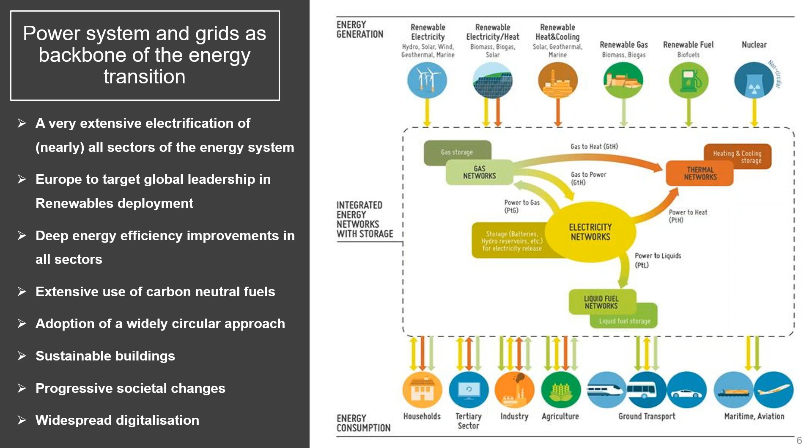Electrification, additional electricity users, e-mobility, becoming carbon neutral as fast as possible, sustainable also in the building sector, not only mobility, and all this thanks to widespread digitalization.

So it's about efficient smart grid systems. We've been looking at that for the last 4 to 5 years now, and it's progressive. As you see, we'll discuss today a first white paper the working group produced on sector coupling, but things evolve. We want to go more into detail, so we're currently already working on the second white paper. It's really about how to optimize everything connected, related to electricity grids, and the integration of this electricity backbone architecture within the overall energy system.

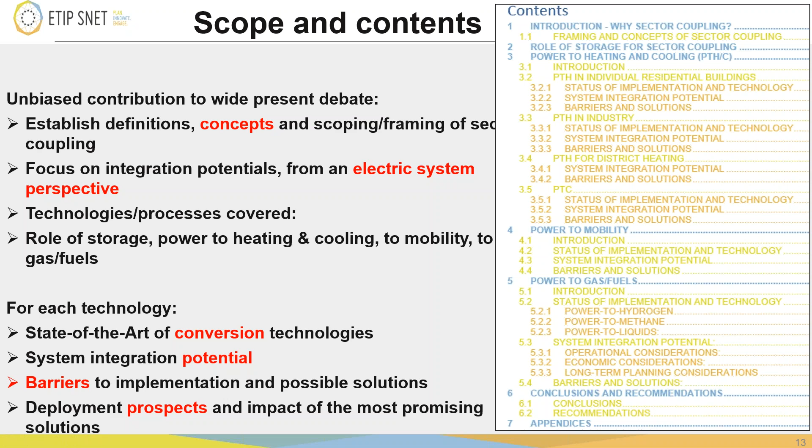Maybe it's only slow. Let me see if it works. We have a plan B, but we'll try to stick to this.

The white paper is a bit wider than what we are going to present here - of course it's some tens of pages, so for more details you can go to that one. The second white paper will be a bit different. It's not touching anymore on the technologies of energy conversion, but on many other issues around this and the ecosystem - building blocks, interoperability, some digitalization aspects, architectures, and also economic assessment of use cases. This will be published at the end of the year.

So entering into the topic of today, we have to be a bit preemptive on the timing of this - there is some delay.

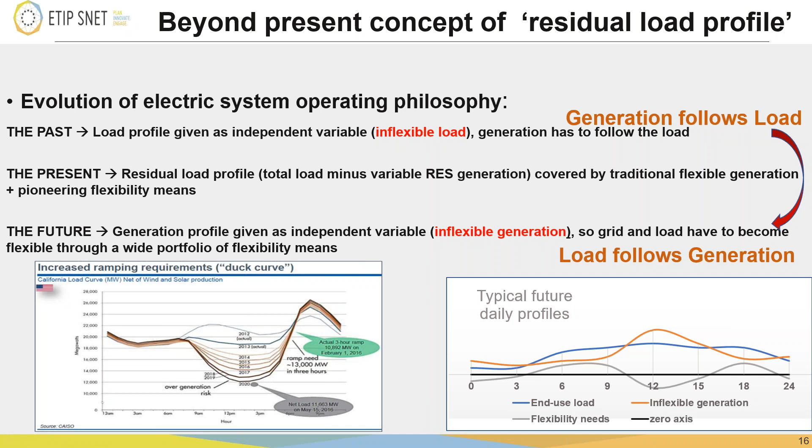About today, because of the issues.

We are in a big paradigm shift today. We are passing from managing the network as load, where generation has to follow the load - load being an external independent variable and generation adjusting with its flexibility. We are now in a transition period talking about residual load, but we will arrive at a situation where variable renewables dominate and load will have to follow generation instead. So we have to build flexibility into the load, into the grid. Flexibility has become the most important issue for grid operation.

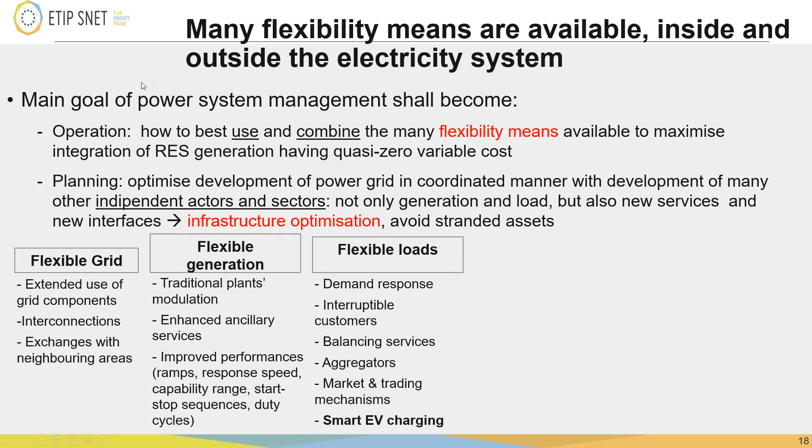I think we will have to go to plan B, Gustavo. If you can take control, I will ask you from this moment on to go.

Flexibility is both in operation and in planning. In operation, it's about how to best use and combine, from a techno-economic point of view, all the many flexibility means available. Planning takes a step further, to plan in a coordinated way not only the grid reinforcements, but also the load and generation evolution and the flexibility means evolution.

We can categorize flexibility in many ways. Here it is categorized by sector. First, there is some flexibility within the grid itself, already used at maximum level. Then flexibility in generation - the traditional one, thermal or hydro plants, which can be adjusted with certain time constants. But now we need flexible loads, which we traditionally had through interruptible customers - a rough way to call a flexible load. We will have demand response, which is a low-hanging fruit. It will be important, and now it has become important.

Other flexibility means include storage. Storage can be classified in many ways - here classified by whether it is within the control of the electric system or beyond. Whatever device is directly connected to the electric system, exchanges energy as electricity and gives it back as electricity, is normally under the control of the electric operator since it's connected to the grid. But the next stage, and what we are actually dealing with today, is flexibility beyond this.

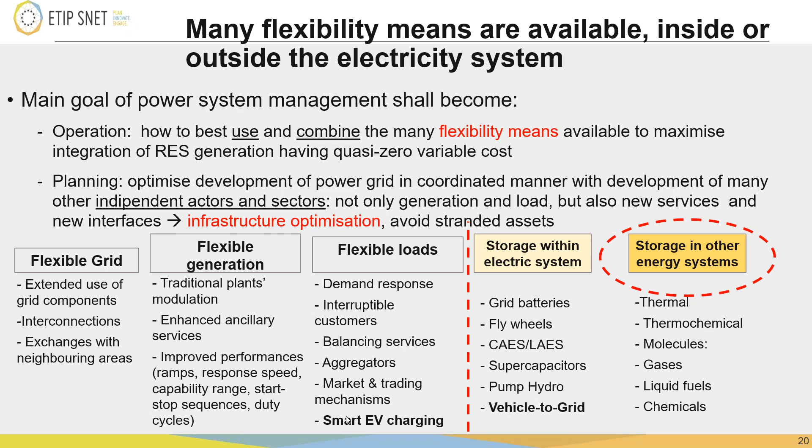Here it's written as storage, but it's not only storage - it's also flexibility means in other energy systems. In the next slide we can see this can span different energy sectors - transport, district and industrial heating and cooling, but also residential through district heating. It can take the form of molecules, touching on the chemical industry, producing hydrogen and its chemical derivatives. You can have synthetic fuels, and eventually these molecules can also be transported.

There are many definitions of sector coupling. What's given here is still from an electric operator's point of view, because it's important to note that if you couple sectors, you have to match the needs of both or more sectors - there can be more than two coupled. As ETIP SNET, particularly Working Group 1, we see the perspective from the electric system, which has to be matched with other perspectives. Sector coupling in general can be seen as an optimization among multi-energy options for supplying final uses. On top of this, a more advanced interpretation is to have CO2-free fuels for transport, and even alternatives to power transport using molecular transport.

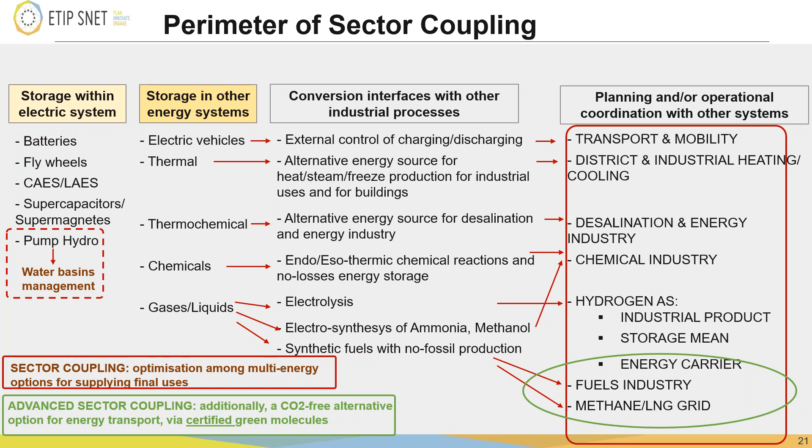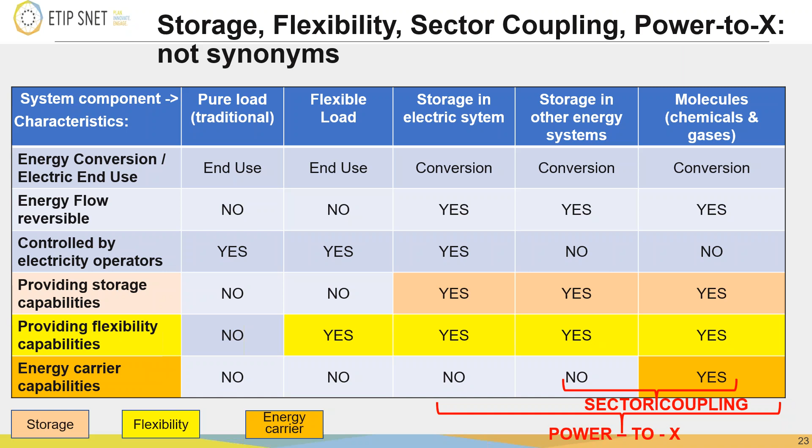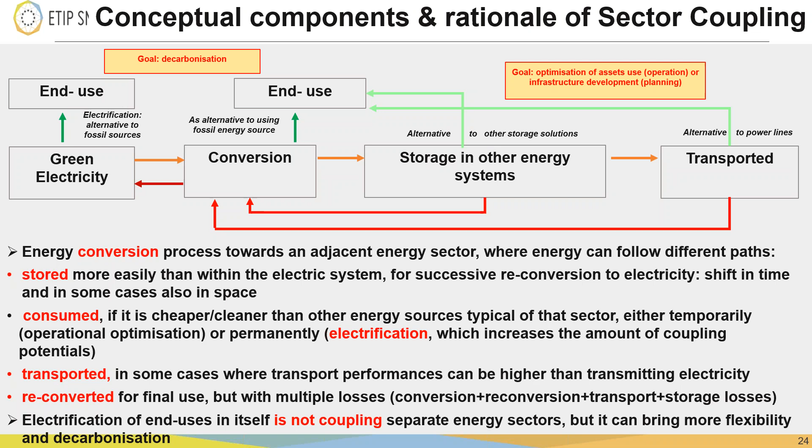It's important to say that either the goal is decarbonization, or it can be optimization of the infrastructures, either in operational or in planning stage. I see these as the two main categories to go for sector coupling projects.

They may coexist, but it is important to have them in mind, because when we have to assess any project economically in an agnostic way, not coming from a preconceived idea that, for example, we have to go for hydrogen because everybody is going to hydrogen, I think the right concept should be: what is the goal for this project? Let's build the use case, and then we put the numbers, economics, it becomes a business case, then we can assess it. So it's always important to assess this project versus the best alternative we have without sector coupling, but achieving the same goal.

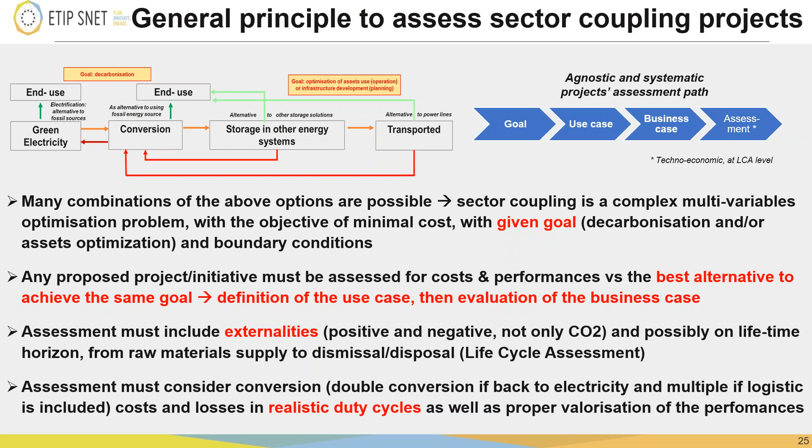For example, if I go to electric cars with non-smart charging, I just have an extra load in the grid, in the system. I need to make adequacy adjustments to the generation fleet, to the grid, especially the distribution grid. So I have an extra stress to the system, I don't have help. If instead I use smart charging, then I have another flexibility means, because I can control from outside the rate and the time of charge, and this gives flexibility to the system.

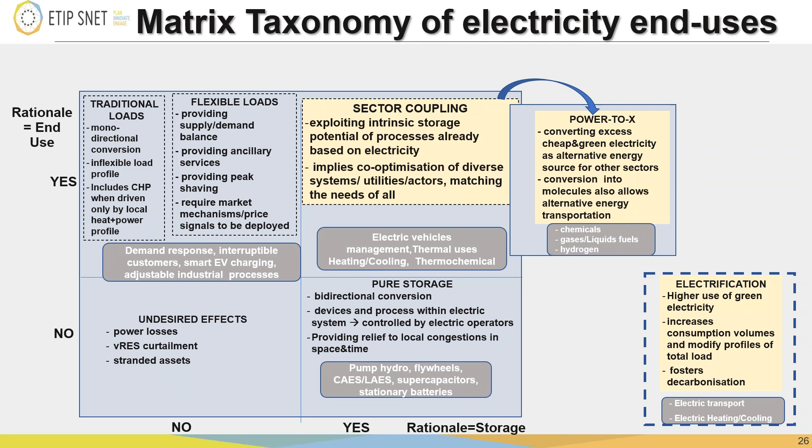Another form of taxonomy can be based on the flexibility features. Since flexibility is the paramount need of the grid of the future, you can ask yourself if they can give or not, and how much flexibility. You can have a taxonomy based on this.

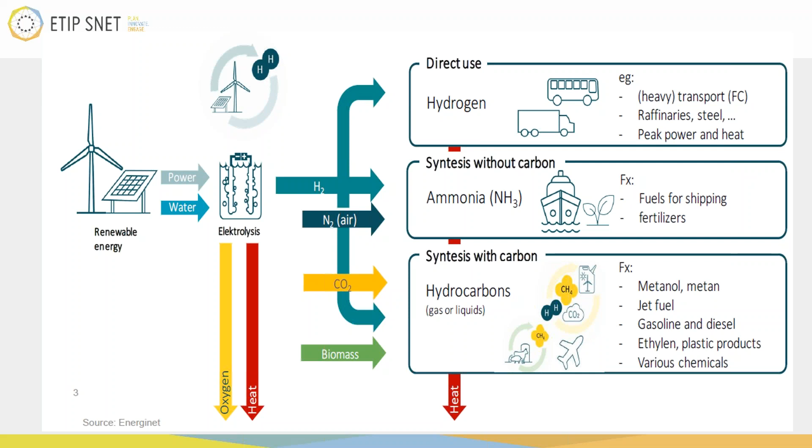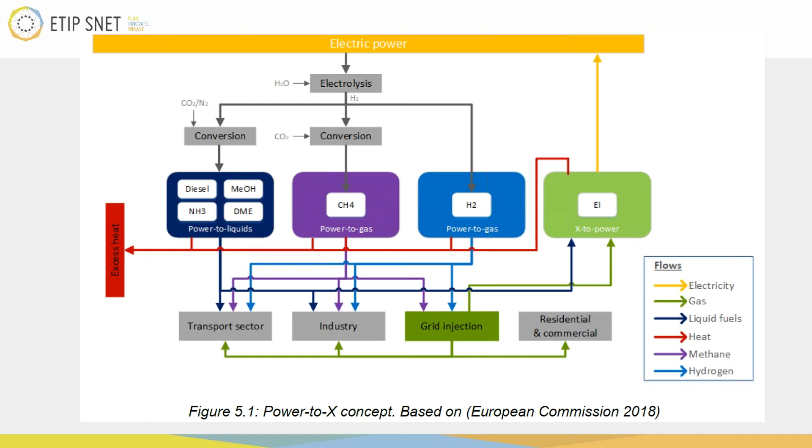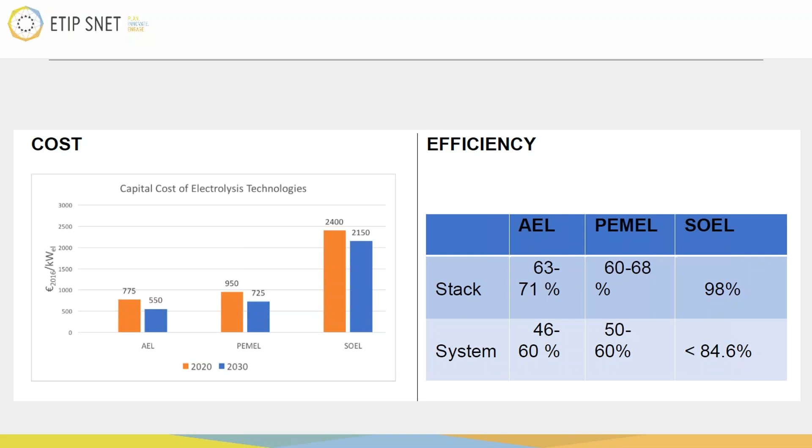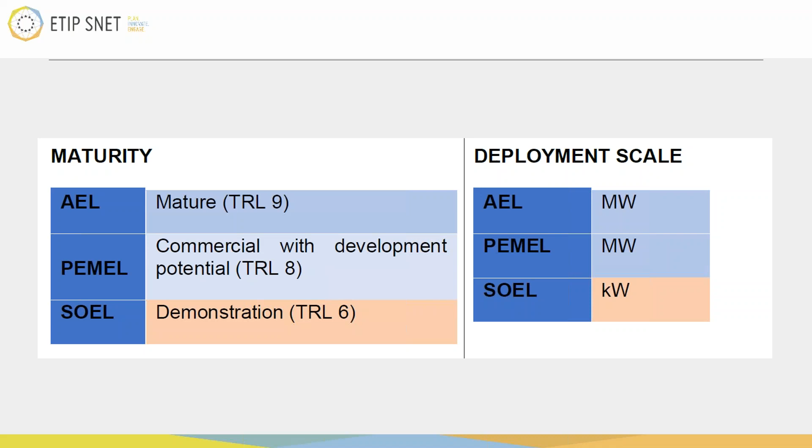And if we talk about the biological process, these are microorganisms that act as catalysts, under anaerobic and aqueous conditions, with moderate temperatures and low pressures. So in the future, we might expect this could be a low-cost option.

This is an emerging technology, so we are more at a TRL around 6, and we're currently deploying it at kilowatt scale, expecting to reach methane conversion efficiencies of 80%. The projected costs are between 75 and 1,000 euro per kilowatt, so it's really a large span, and it's really a developing technology. But we have more than 30 catalytic or biological power to methane pilot projects being planned or already in operation.

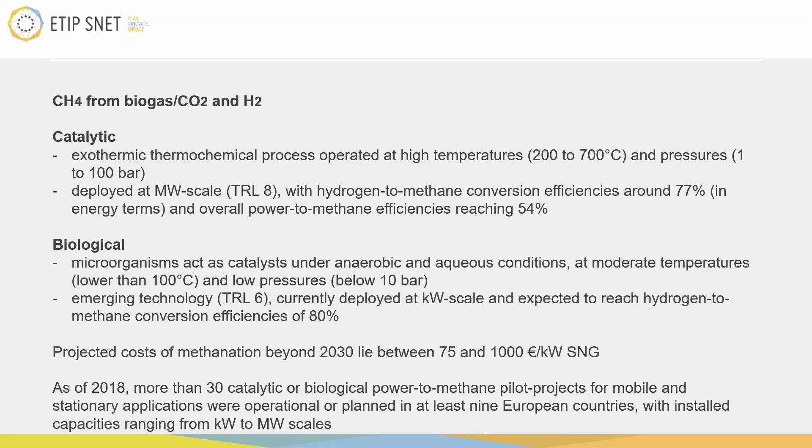So it's something that we see coming. And I can say that in Denmark, I think we had around 20% of the gas in the grid last year being from biomethane. So there is a potential for converting from natural gas to biomethane in these ways.

Then going to electrofuels, so these liquid fuels where we add hydrogen. To the left, we have Fischer-Tropsch, we have methanol, and we have ammonia processes. We see that we are still kind of developing the ammonia, but we are expecting large decreases in costs on the Fischer-Tropsch and the methanol. And for the ammonia, we're expecting kind of levels at the level we are today with the capex for the others. And on the OPEX, on the other hand, we expect lower from the ammonia plants. And in terms of efficiency, then we expect a higher efficiency. And as I mentioned, ammonia, of course, used as fertilizer, but could be used for shipping as well.

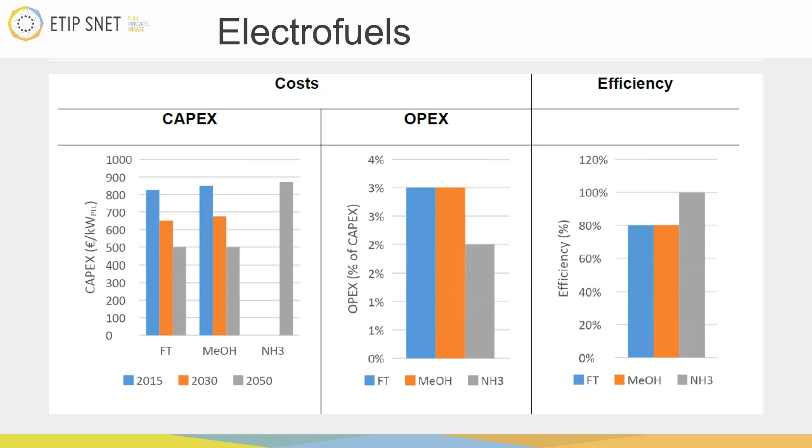In general, for all of these processes, it is established technologies, but they're not really implemented at large scale for power to liquid processes. There are some examples. So for Fischer-Tropsch, there are examples in Dresden and in Norway, for the methanol in Iceland. And then for ammonia, there are also some examples, albeit maybe at a smaller scale.

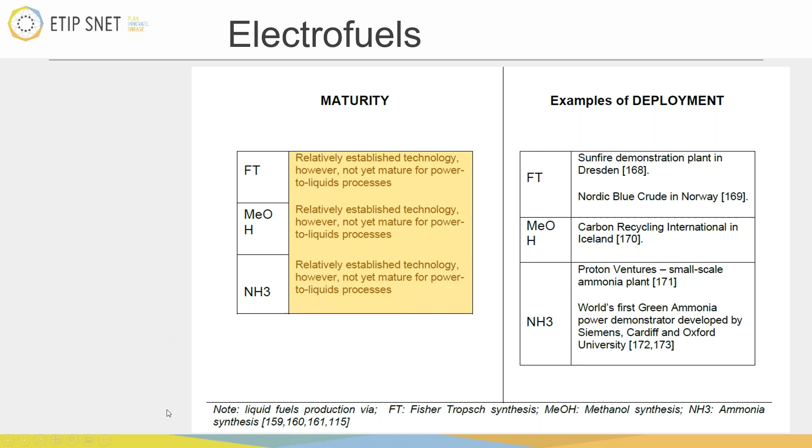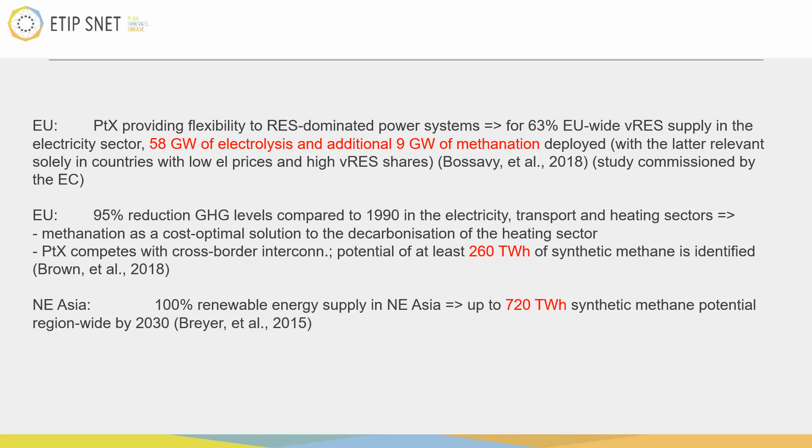If we talk about the potentials for power to gas or power to X in general, here are some examples of studies that have been made, where we see at an EU level a study saying that if we have 63% variable renewable energy supply in the electricity sector, it would be feasible with around 58 gigawatts of electrolysis, an additional 9 gigawatt of methanation, and another study with a 95% reduction in greenhouse gas levels in the EU, reaching around 260 terawatt hour of synthetic methane. And in Northeast Asia, they're expecting up to around 720 terawatt hours of synthetic methane. So we do see potentials in different studies for this technology.

This is now an example from a German study where we see that around the Ruhr district there is quite a potential going forward, and the total hydrogen demand in that study is estimated at 94 terawatt hours for the whole of Germany in 2030.

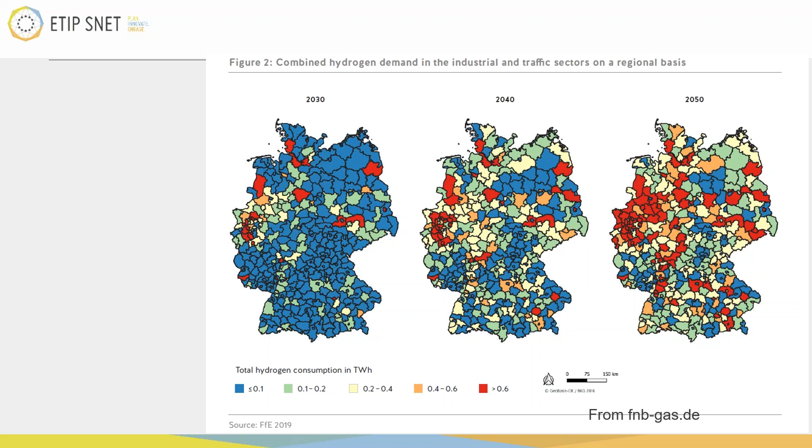Yes, I think that, so if I summarize, it has a promising future. It can be an enabler for sector coupling. It can provide flexibility. It contributes to the greening of the difficult sectors, industry and transport, and it can boost the limited available resources of sustainable carbon and biomass. So in general, we can say that barriers to having this implemented at large scale are both in terms of technical, where we still need some development, and then economic and institutional and regulatory considerations, where we need to facilitate these technologies and the integration of markets.

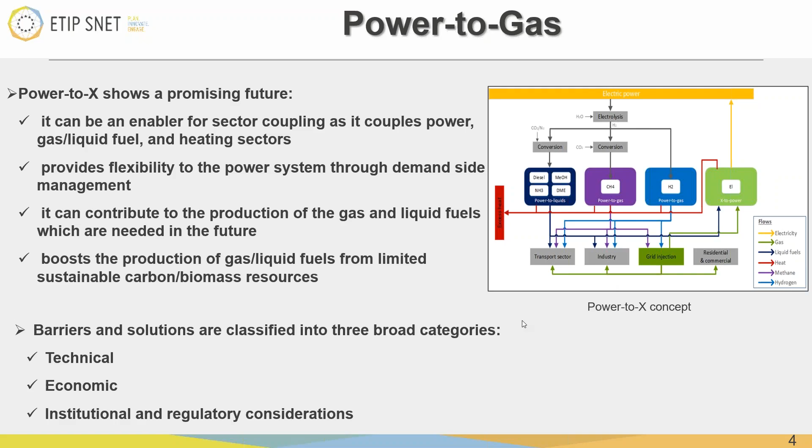And I think that concludes my presentation. Thank you.

Thank you. I will take over here from Marie. I will explain a bit about the power to heating and cooling. So yes, please, next slide.

So there are various different uses for power to heating and cooling, and today I'll go into detail with the district heating part, but just to give you a brief summary, we have potentials in residential buildings. Typically, you can see heat pumps in residential houses. Same thing for power to heat in industry, where you perhaps see slightly higher temperature demands, for district heating as well, which we're going to discuss today, and then of course power to cooling, which is another field that you can read more about in the study that we've done.

With this example, I'm taking point of departure in power to heat in district heating. Many of the principles I'm going to discuss apply in the other sectors that I described. Essentially, if we start out in the top right corner, we can see this chart with heat production cost as a function of the electricity price—heat on the vertical axis, electricity price on the horizontal axis. You have two production units: one is power to heat, another is, for instance, a boiler. You can have many different setups, but in this example we're taking point of departure in a boiler. Those are operated according to generating the least cost heat, so the optimization is according to heat demand.

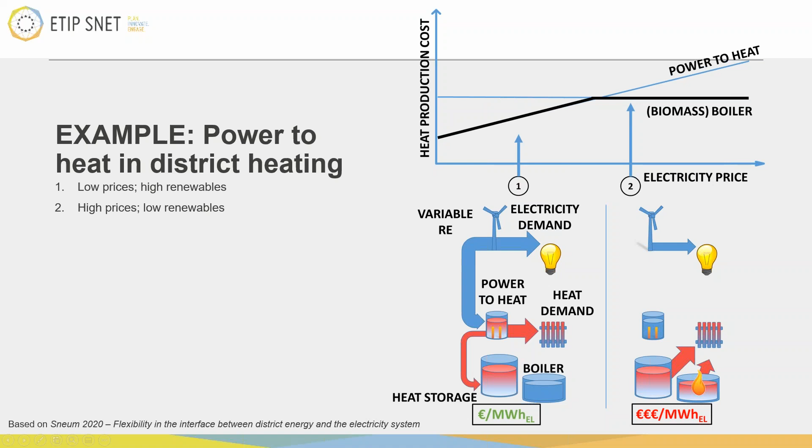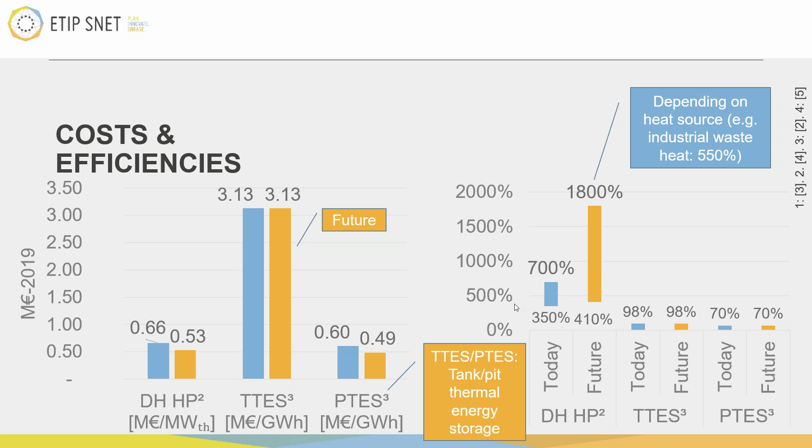On the technology readiness level and deployment, as mentioned before, we have almost mature technology, or at least operating at commercial scale in all cases - heat pumps and the different thermal storages. But there is room for improvement for heat pumps specifically and pit thermal energy storages. In the latter case, that has to do with the liner material and insulation.

If we look at the deployment, the statistics are not as extensive as you'd typically see for the electricity sector. But for heat pumps, we have a current deployment of around 1.5 gigawatts of heat capacity on the European scale. And for tank deployment in the Nordics, we have just below 100 gigawatt hours of capacity.

Just in Denmark, we have roughly half of that in pit thermal energy storage, which are very large storages. So there are quite few of them, but they have very high capacities. We can see that in the subsequent slides.

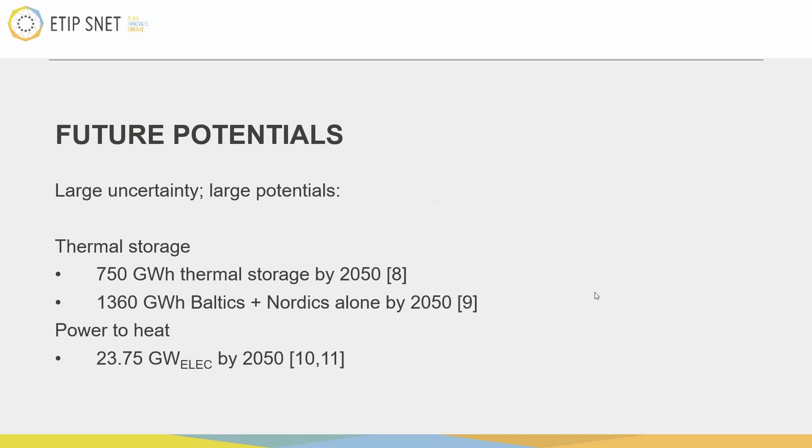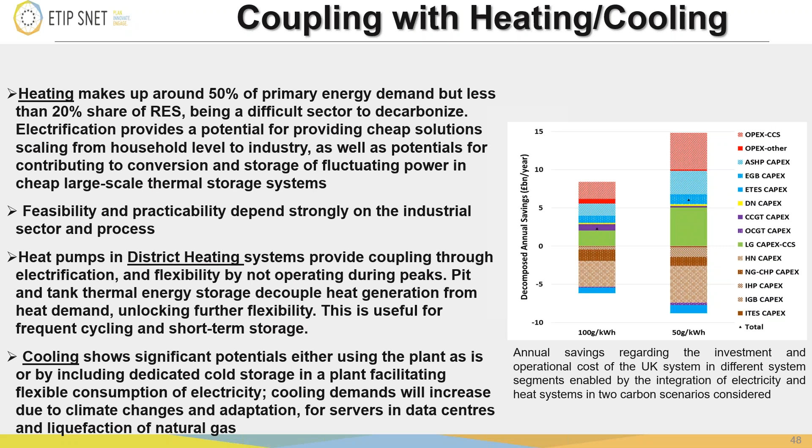The next slide shows a few of the references.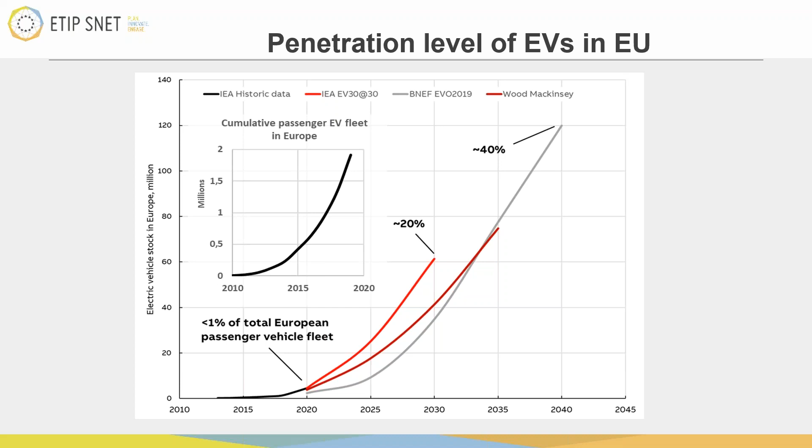Although these have now been significantly enhanced, there is now significantly more interest, particularly in big cities, to have buses and taxis running electric. This is just to say that there is a very, very growing interest in the electrification of the transport sector in order to meet the overall carbon target and also local emissions. Let's go to the next one, please.

This is one of the core aspects of Working Group 1: to understand the interaction of these vehicles and the system, and the integration challenges and opportunities to make that work. On the left-hand side, you've got the end consumers with home-based charging, but there is now very significant interest, and already demonstration, using fast charging, and also, at the bottom left, ultra fast charging.

So charging stations are now being developed, and there will be a number of them over the next year or two across Europe. There will be massive demonstrations of these, in addition to home charging, big ultra-fast charging stations that connect to the electricity system from low voltage where the home is, to high voltage where the ultra-fast charging would be, close to the overall generation system. What we've been looking into here is this interaction between the charging and the entire energy system.

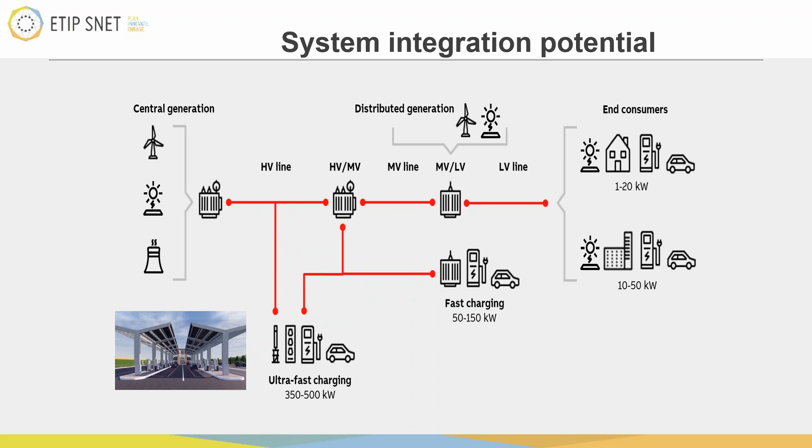So let's go to the next one.

One of the core challenges is associated with the impacts, and I'll show you that peak demand would nearly double if we electrify the transport sector and don't do it in a smart way. There's been quite a lot of interest here in terms of the core topics: generation adequacy, transmission, cross-border distribution, and flexibility.

The question is, if we electrify the transport sector, what are the implications on how much generation capacity is required? Will the transmission network be able to accommodate these vehicles, what are the implications on the distribution grid and hosting capacity to accommodate this local charging demand? There are also implications regarding flexibility on the generation side—how are we able to quickly get generators on and off to respond to how the charging might change. Go to the next one, please.

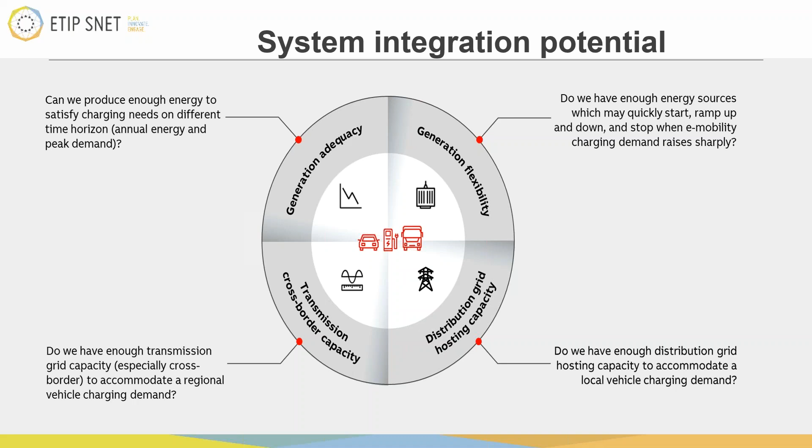There are also opportunities with smart charging, but also vehicle-to-grid. I'll provide some information that's not all in our report, but this is just to give you a feel of the background, where these recommendations come from, and the logic behind them. So let's go to the next one, please.

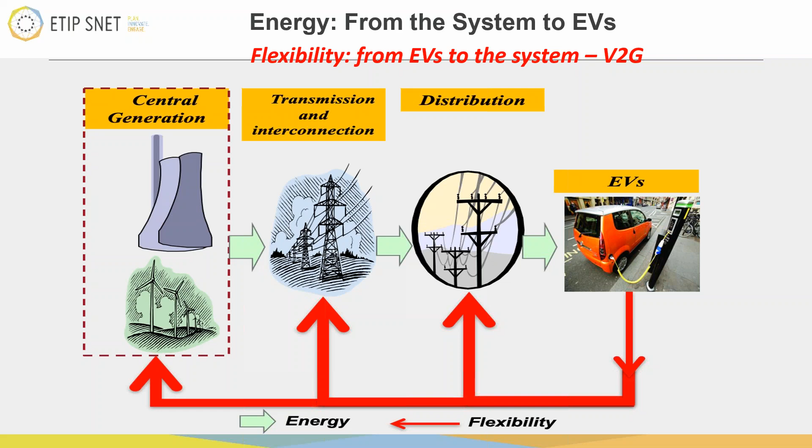This is the analysis carried out with European projects regarding the implications of the deployment of electric vehicles, looking at the national and international level, but also at the bottom the local distribution networks, low voltage. Looking at this in a coordinated fashion is what's important.

The input data at the top shows different penetration levels and the evolution of the system. I'll show you a quick result in terms of how the European generation, transmission and distribution system needs to evolve, and what the implications are at the bottom: what is the impact of the rollout of electric vehicles on the European energy system?

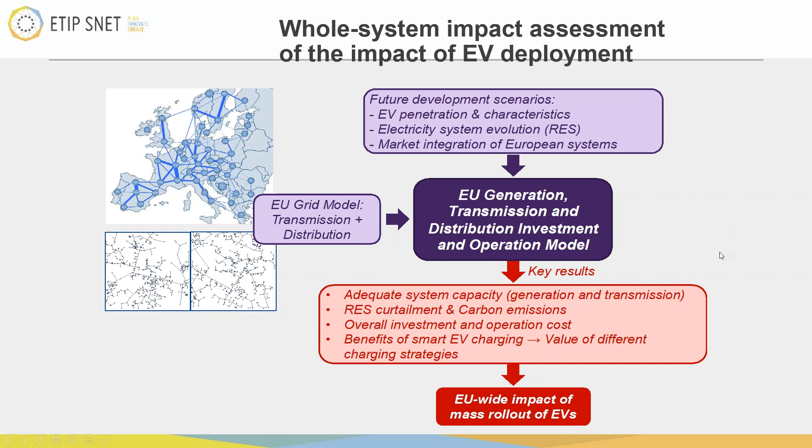Just to give you an illustrative example, on the left-hand side you can see what are the emissions of electric vehicles per kilometer, the CO2 emissions per kilometer.

Currently, the emissions from new cars in the EU are about 120 grams per kilometer. In a business as usual world, electric would be around 20, say 25, so significantly lower.

But if we don't charge them in a smart way, if we charge them during peak conditions, then you would have conventional generation with higher emissions, so they would be about 25.

But if we do this in a smart charging way, charging vehicles mostly overnight when they are not used, the emissions reduce 5 times, down to 5 grams of CO2 per kilometer.

But if we provide vehicle to grid services, for example frequency regulation where you inject power for 10 minutes occasionally, you can see the emissions are in fact negative. This fundamentally means that vehicles providing these flexibility services produce lower emissions than if the vehicles were not there but we are still charging them.

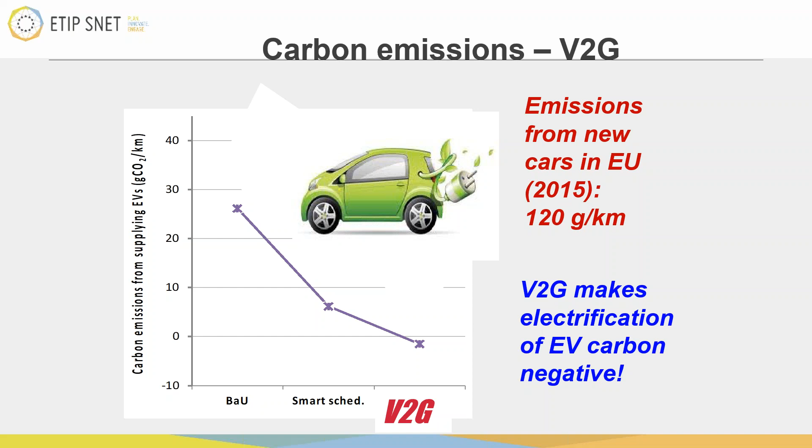We'll see in a minute that vehicles providing vehicle to grid services should actually get paid for charging. So let's go to the next one.

Let's go to the next one. I know we are running out of time, but yeah.

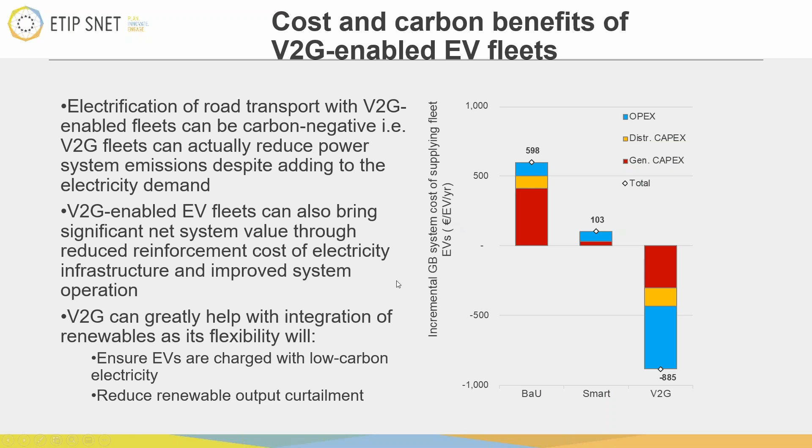This is to illustrate there is a huge amount of interest now in these EV hubs, EV charging stations, which are already beginning to be deployed with potentially very large batteries or charging stations.

For example, when you go to a supermarket, there are now developments in a few places in Europe where you can drive an electric vehicle, plug your car in, and it will be fully charged in half an hour by fast charging. So when you finish your shopping at the supermarket, your car is fully charged.

These systems could also help significantly support the integration of renewable low carbon generation into the system. It was pointed out how important storage is, and if we electrify the transport sector, there will be hundreds of gigawatts of batteries in vehicles.

Can we make use of those batteries rather than building other batteries as well? Can we use them not only to properly drive the vehicles but also to provide system support? That's why this whole systems approach is critical.

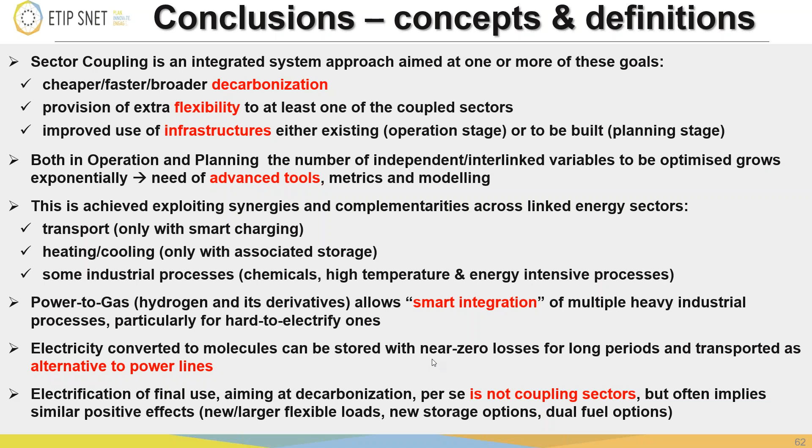So this is a huge potential we see, and what happens with this linking is that it can be a win-win situation, as Antonio was saying.

So we can have electrification help these difficult to decarbonize sectors, and these sectors can provide storage and flexible consumption for the power sector to really be able to integrate more variable renewable energy. So it can be a win-win, but it has to be managed smartly. If we do this in a dumb way, as Goran was showing you, it may just add costs and more greenhouse gas emissions, whereas if we do it smartly, we can reduce it. So we need to coordinate, and these different flexibility measures are in competition with each other. As Antonio was saying, we need to coordinate this so we don't build double infrastructures everywhere, which would make this whole transition much too costly.

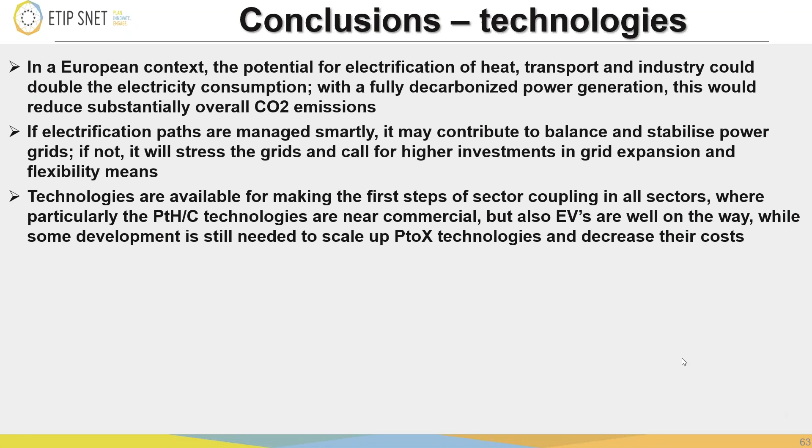Thank you, Marie. I will add some recommendations on the last slide, and then we'll open to questions.

First of all, I would like to stress what was clearly shown by Goran in the electric vehicle example. This is not a neutral thing. Electric vehicles either will be smart charged and benefit the system, or they will not be smart and they will stress the system. There is no business as usual. Either you have a problem or you have an opportunity, and the time to act is now, because this is the moment where charging stations are being developed and implemented.

In general, all the project initiatives — well, sector coupling is a very differentiated hat for so many different initiatives. It is important to have some metrics and methodologies to assess each project case by case, using maybe some harmonized assumptions, but it has to be very clear what the use case is, what it's going to substitute, and what the clear benefits are, including externalities, typically CO2 but not only, with a realistic duty cycle, because in power to gas, for example, some of the steps are still at laboratory level, and the conversion and other performance parameters have to reflect a realistic duty cycle. Like when we test a car in the laboratory versus testing performance driving from home to office — it's completely different. We should also possibly extend this to the whole life cycle assessment, from raw material to disposal, which is something we should do in general.